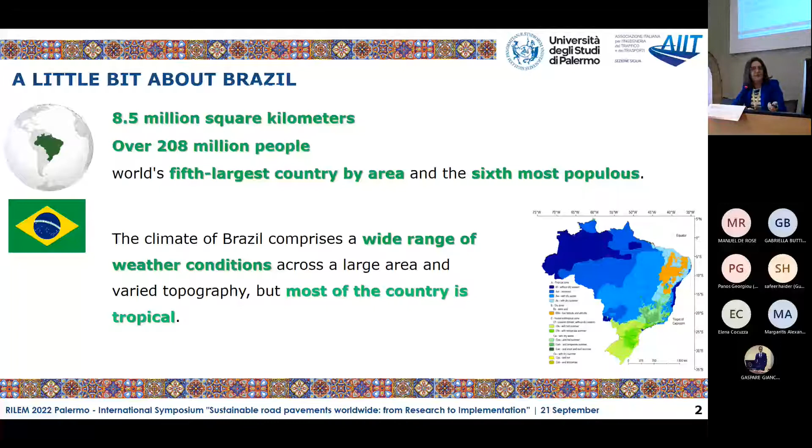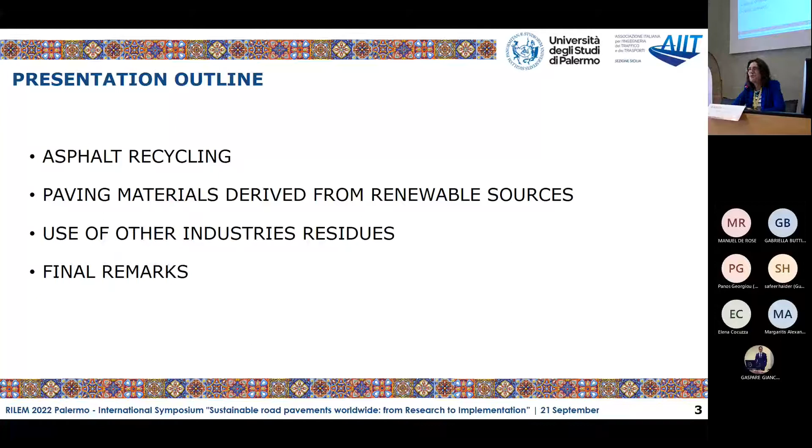I'll try to focus the presentation on three main topics. The first one is asphalt recycling. I think it is a very hot topic everywhere. We are much behind most of the European countries. I can assure that in terms of the amount of RAP that we can put on our mixes. With respect to the cold mixes, we are doing a little better, but we still have a lot to do. Then I'll move to the renewable sources. There are some interesting numbers from Brazil that I want to show you, and use of other industry residues. I'm not going to say waste anymore. I've learned from Professor Molinar. Residues is fine, or byproduct, co-product, we might think about it, but no waste. And some final remarks.

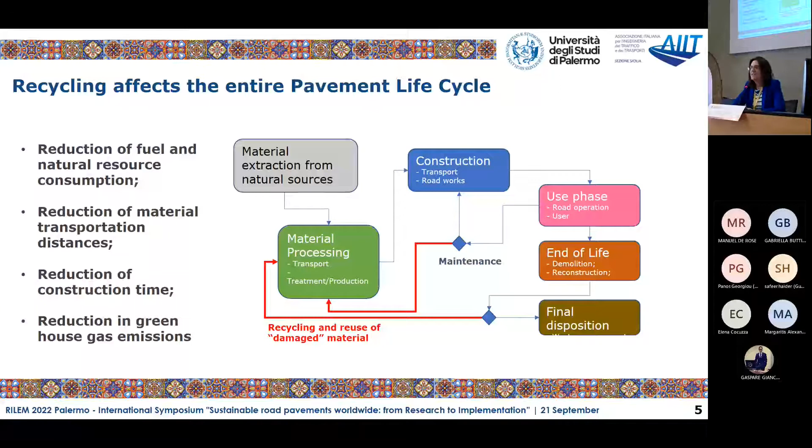So with respect to recycling, I'll just pass very fast. You all know the advantages of recycling. There are many types of recycling for the wearing courses, for the base courses, with different stabilizing materials. And one important point, we don't have information in Brazil on how much RAP we produce yearly. We have no idea. There is no data. And what happens in the end is the milling process happens, they just put it along the road in some place, some small city, stop a truck, get the RAP, normally already contaminated. So the whole process makes it much more complicated to use this RAP, especially for a new wearing course. So this is something that we have to realize and make better.

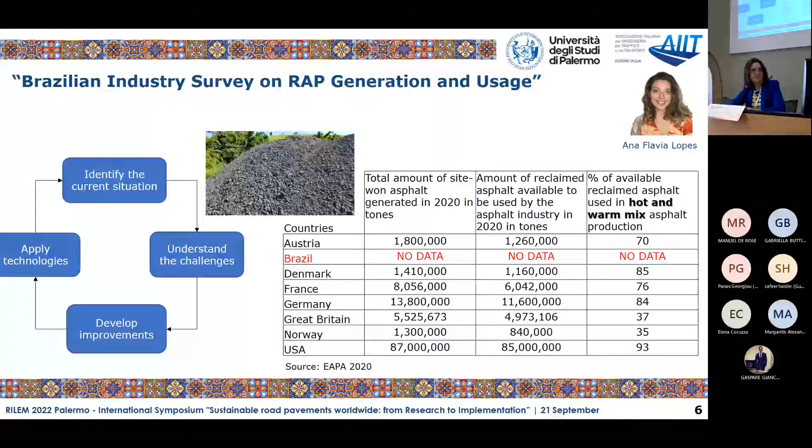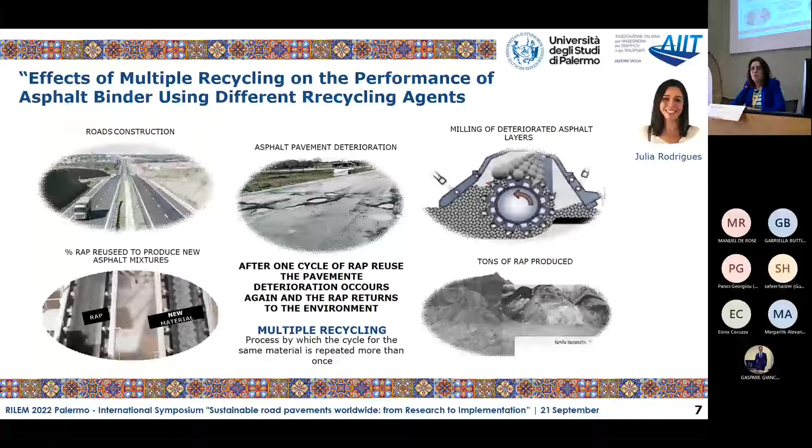I'm going to show some pictures along the slides. Those are the graduate students that, in fact, are the ones who do the job. So Ana Flávia is putting together some information and getting information from the road agencies along the country, from the toll roads, from municipalities, and trying to have at least a rough number of what is going on in specific regions of Brazil. We have another important topic that we have to think about. I know there was and there is still some research in France on multiple recycling. So we are recycling now, and in 10, 15, 20 years, we have to recycle again. So there are a few research questions.

First, which recycling agent should we use? The RAPs are not the same. The recycling agents are also not the same. How many times can we do this? Is there any maximum amount of RAP that is going to allow us to repeat this process many times?

So this research effort is going on right now. I think for us, it's still far from implementation, because right now we are still doing the recycling for the first time. I mean, for the wearing course. For the base course, we have done it more times, but for the wearing course, we are on the first cycle.

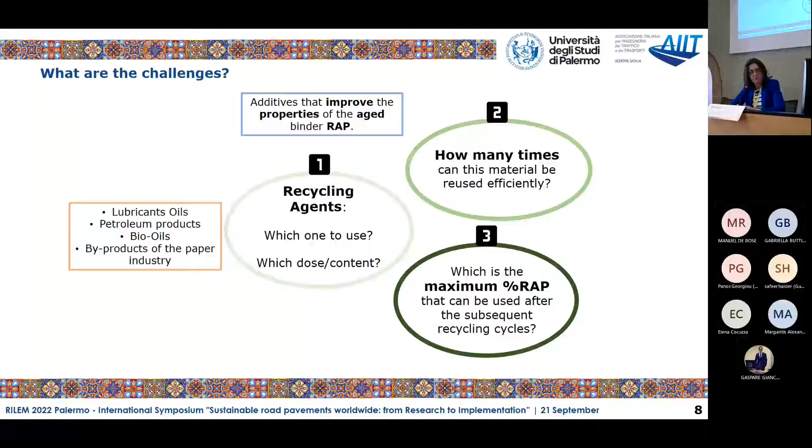And what happens in Brazil in terms of implementation is that normally the road authorities, the toll roads, put a low amount of RAP, 15, because of the asphalt plants. Our asphalt plants are not really prepared to put more than that. And they just want to reduce the amount of new binder. So no recycling agent, no extra investigation on what type of neat asphalt binder or new asphalt binder we need. This is a point that we should also look at.

The previous speakers also mentioned the life cycle assessment. This topic is also new for us. And one important point is we don't have primary data in Brazil. So we normally rely on data from Europe or from the US. The energy matrix, if we compare, we just had a study between Switzerland and Brazil. The electric matrix between both countries is completely different. Most of our energy comes from water in Brazil, say 70%, 60%. And it's not the same in Switzerland, for example. China is different, the US is different.

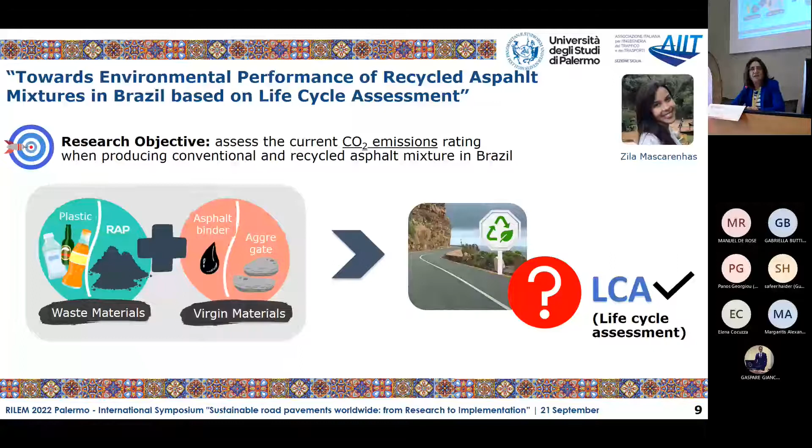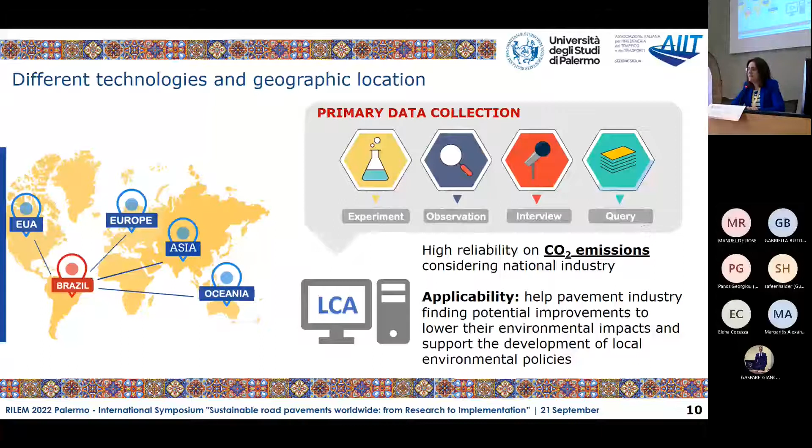So how can we rely on data that were not really collected for our scenario? So the idea of this study is to start going to the plants and start getting information from our specific case. There is a huge effort between university and road authority, the Federal Road Authority, that now requires it as mandatory for new projects that they implement at least 10% of RAP in the mix. So it's going to change the whole pavement chain. The asphalt plants will need to adapt to that somehow. So we have to collect this information.

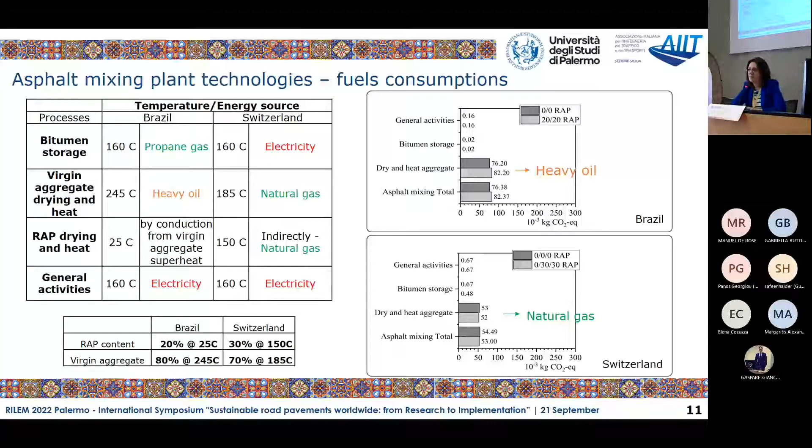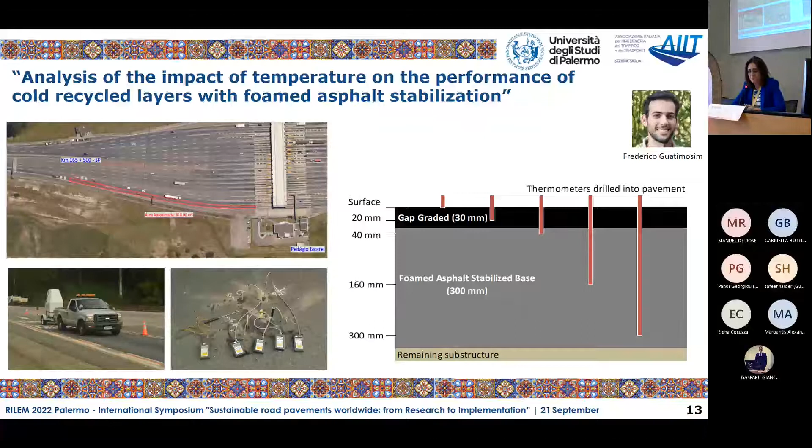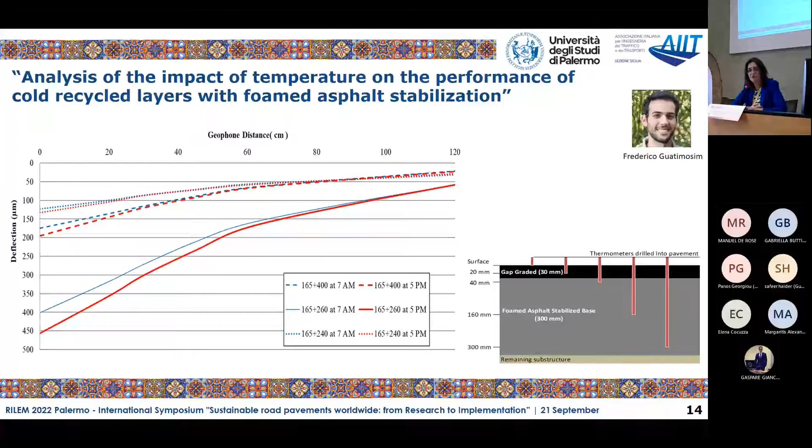Regarding the materials from renewable sources, we had this year the first workshop on biomaterials for pavements. This is a very hot topic. And I think when we are talking about biomaterials, we have to understand what about your country or what about your region? Brazil is known as an agriculture country.

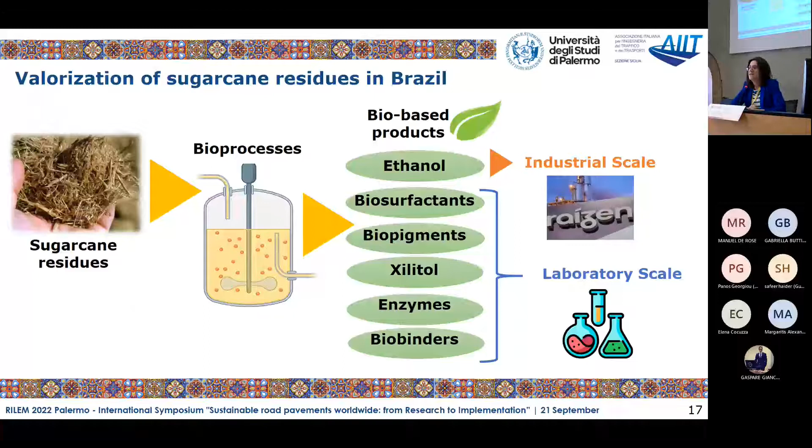We are in transportation engineering, and we have also a group from the biotechnology from the same university under this development. And for the sugarcane case, Brazil is very well known for the ethanol production. So when we are talking about implementation, ethanol is already in the industrial scale. The other products that come from the bioprocesses of sugarcane or the residues of sugarcane are not implemented yet. So we are still in the laboratory scale. And we have a student working on that. So she's working with sugarcane bagasse and rice husk.

And some initial results, we have 3 different temperatures. This is a master curve, G-star master curve. 40 degrees C, 60 degrees C, and 70 degrees C. The black one is a neat asphalt binder. So for the sugarcane bagasse and for the rice husk, we had similar behavior, but only at high temperature. The material is still very sensitive to temperature. So we cannot say it's implementable yet. We still have a lot of work to do, but it's part of our research plan.

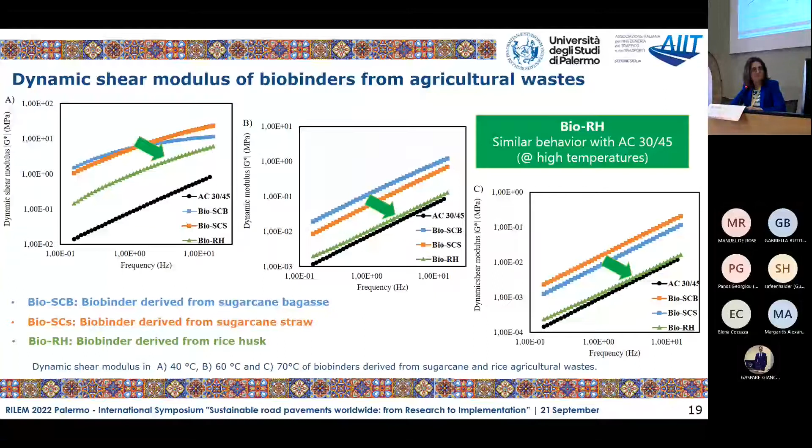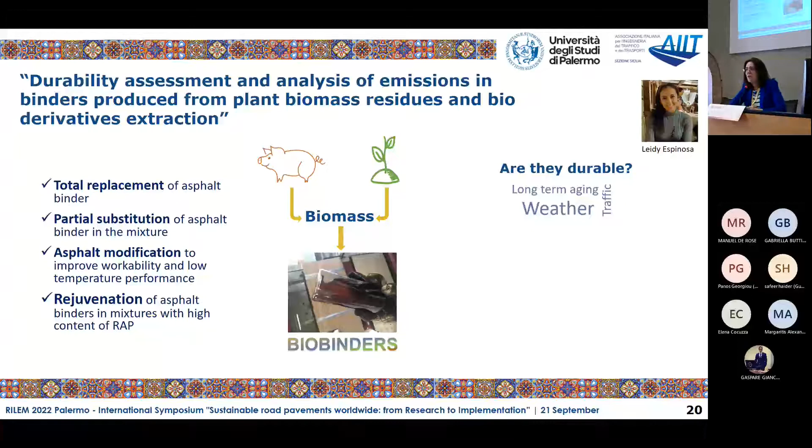Still talking about biomaterials, we had also some discussions about emissions. We have no idea how the emissions of these materials are because we are looking for a material to replace the asphalt binder, not to modify, not to rejuvenate, it's really to replace. So the idea is to have this material in an asphalt plant or something similar to an asphalt plant, a biomaterial plant in the future. How are the emissions of this? We don't know yet. So this is also a huge research effort. We have also to focus on the durability, how these materials behave with hot weather, cold weather, rain, and what kind of emissions.

Regarding the use of other industry residues, I brought two cases: plastics, that was also mentioned before, and the residues from the mining industry. Let's start with the plastics. Here we have another huge difference between the scenario in Brazil and the scenario for most of the countries in Europe, for example. We do not have the culture of separating what is recyclable and what is not recyclable in our own home. I remember when I lived in Germany 20 years ago, and it shocked me. Everything was separate more than 20 years ago. Glass, paper, plastic. In Brazil it is all together. Now, it's a little bit better in some big, more developed cities, but not everywhere.

So we produce around 3 million tons of waste plastic yearly in Brazil. It's a lot. The best solution would be, okay, let's recycle those plastics and try to return them to the same chain that they came from. We do this very well with the aluminum, very well. But with plastics, the food industry, the cosmetic industry, the requests on the purity of this plastic is too high. So it's difficult to get the plastic back to the same chain where it came from.

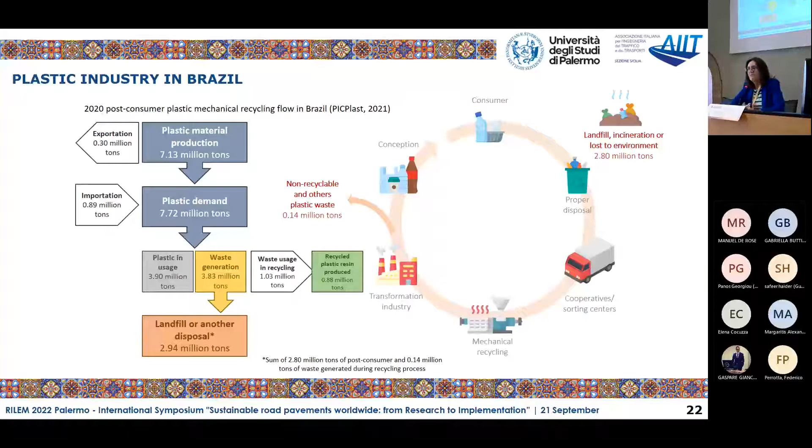Why pavement? We cannot keep putting not waste, but residues on our pavement all the time. I personally do not have a settled idea on what is the best way to do. The group is studying asphalt binder modification with those recycled plastics, which is one possibility, but I think this scenario requires a very pure plastic. We cannot put a plastic that we don't know exactly the composition and keep modifying the asphalt, because we're going to have a different product.

So the dry process, I'm still not sure if it is the best one also, because I think the idea is not to really replace the aggregate by another material. The materials are so different, the plastic so different from the aggregate. So I think we have to rethink the way we design the mix. It's not only replace, it's to rethink the design process.

So in our research group, we have one student working on that. We are working along with the physics department and trying to understand the irradiation technique on those plastics. How does it modify the chain of the plastic itself? How does it reduce the variability of the plastic, and can it really improve the performance of this material in the asphalt mixture?

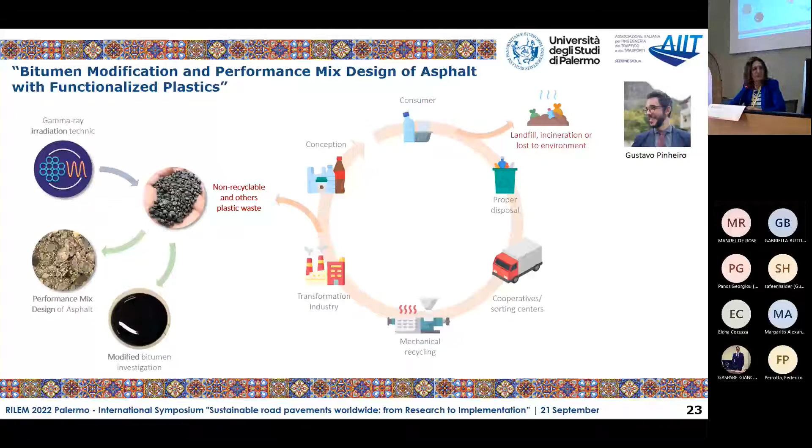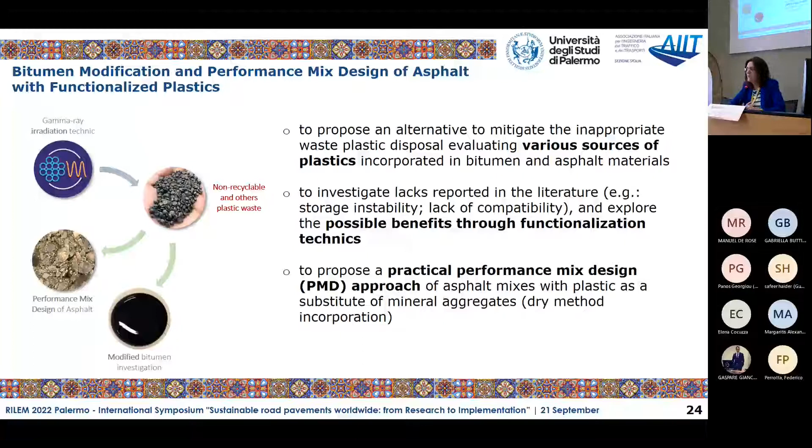So the idea of this project is to really study different plastics, especially those that are not recyclable, or not easy to recycle, at least. Polyethylene and polypropylene are the most common to find for pavements. We want to go further than that. We want to really study those that no one wants.

And the last topic is the mining industry, which is very strong in Brazil too. I'll focus on the copper tailings because we have a new project on that topic. Here is the Amazon, where the two mines we are studying are in the middle of nowhere. The closest city has about 10,000 people and it's 150 kilometers from the mine.

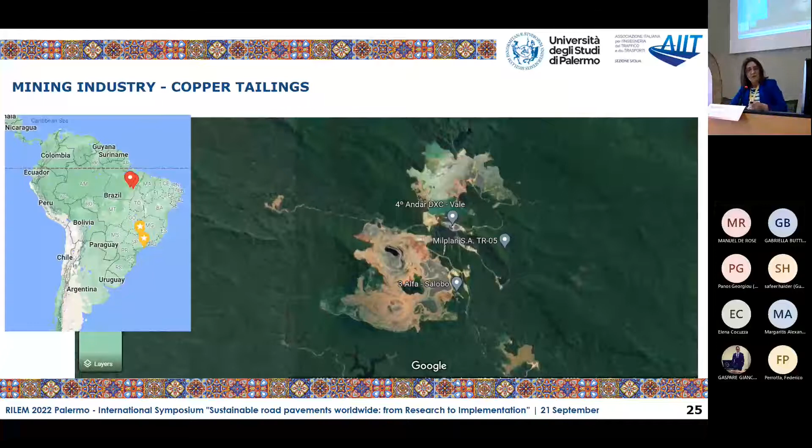And what is the idea? We have the importance of the mining industry for the whole country, but we also have the problem. For 1 ton of copper that is produced, we produce 130 tons of waste. That's not going to be waste anymore. It's going to be a byproduct or a co-product. So the idea of this project is to add value somehow to this material.

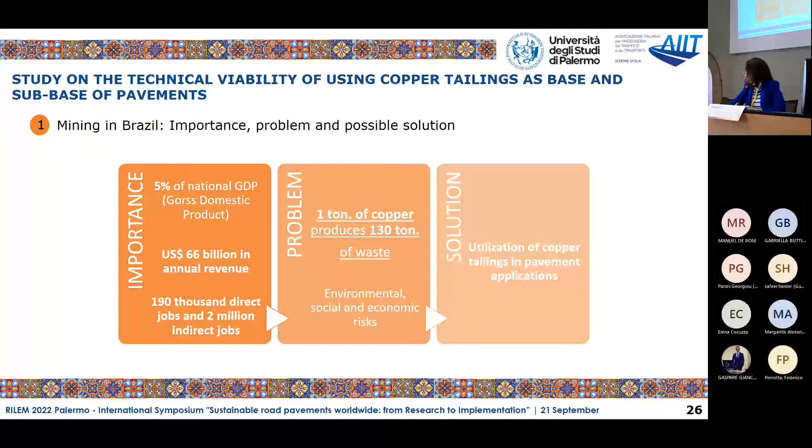And on this project, these are the pictures. Looking at these small pictures, we cannot really understand how big it is. It's huge. And here is the production over the lifetime of both mines. For Sossego, we have almost 300 megatons of this residue from 2004, when the mine started, until 2027. They are almost closing this one. In Salobo, almost 1,500 megatons. It's a lot of material.

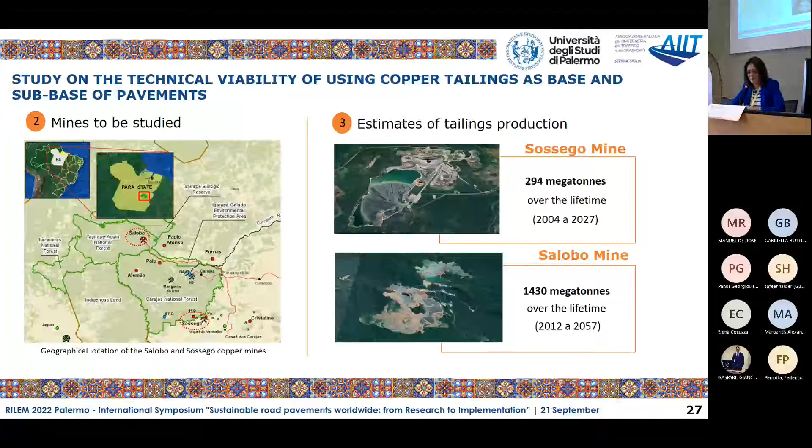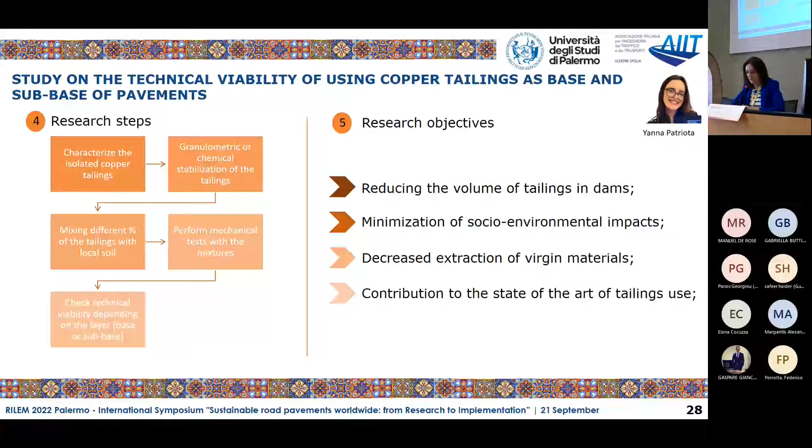The pavement industry will not solve the problem, so the project has different fields, different expertise, trying to add value in different chains for those copper tailings. In our group, for pavement, we decided to focus on unbound layers. Why? We don't have any asphalt plant close to this mine. So it doesn't make sense to keep transporting tons and tons of copper tailings from the mine to an asphalt plant far away from the region. So our idea is to focus the project on having better pavements for the small cities around the mine.

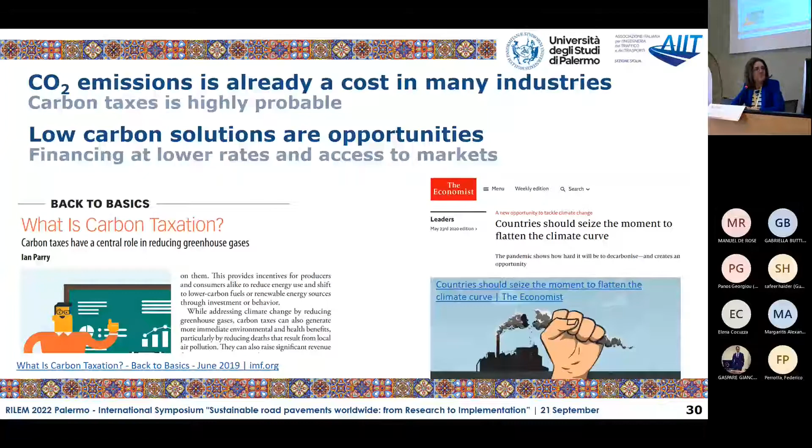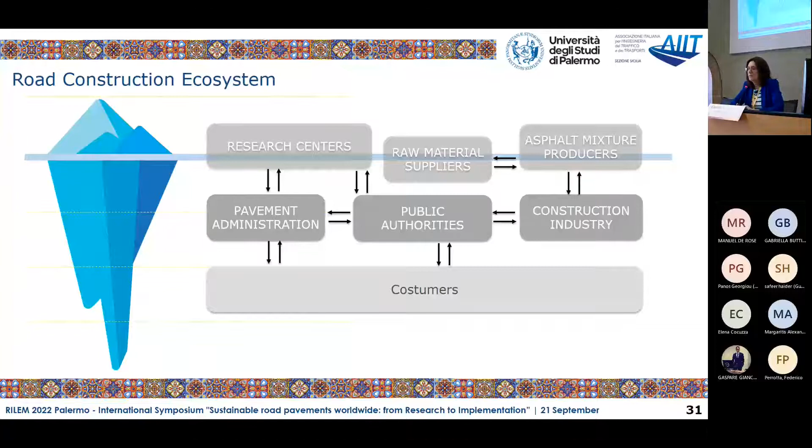But the university cannot do it by itself, the road authorities cannot do it by itself. There is a huge chain that I've called here the road construction ecosystem. We all have to be together, more or less on the same page. I won't say the same page because the goals are normally a little different. But our main focus should be the customers. The society should be the focus. So we need pavements that last longer, with materials that pollute less, using as many local materials as we can so we don't have the transport costs and transport emissions along the process. And with that, I finish my presentation.